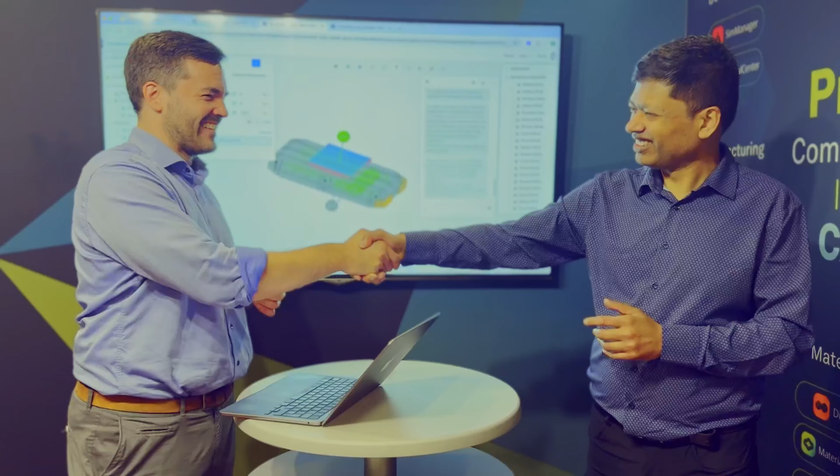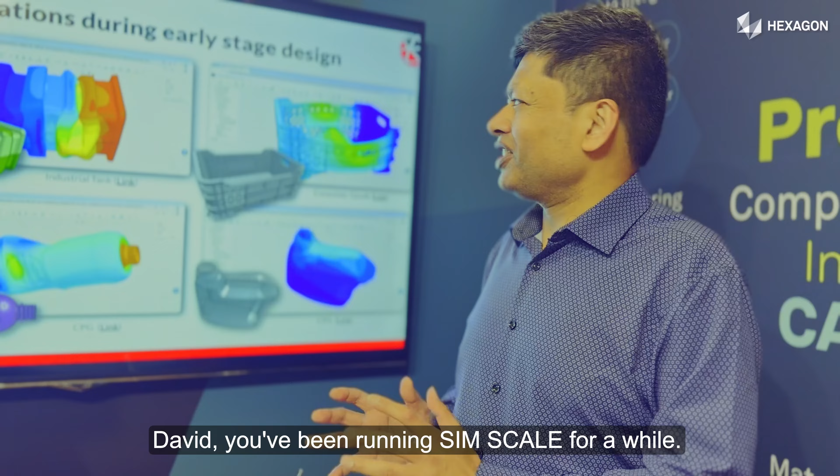David, you've been running SimScale for a while. You're the co-founder and CEO. We just started working with you about a year ago on Marc technology. Why now? Why are you excited about this partnership?

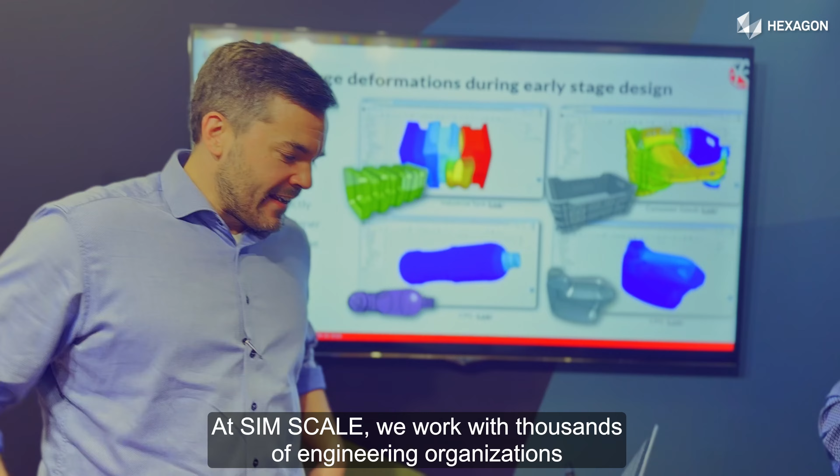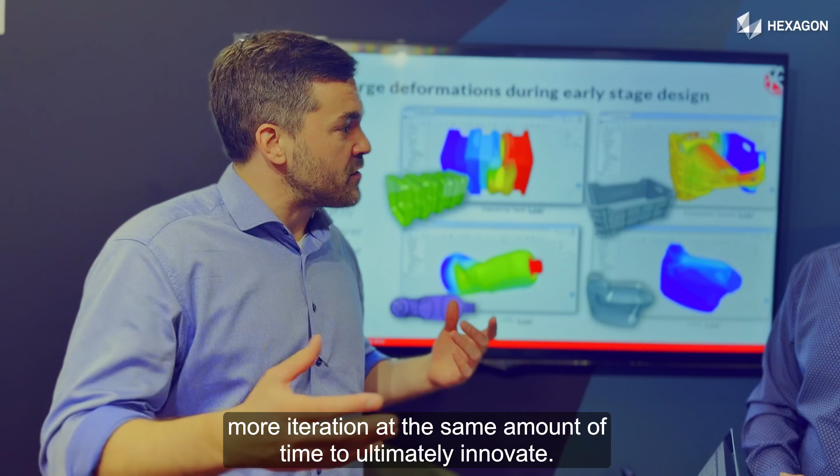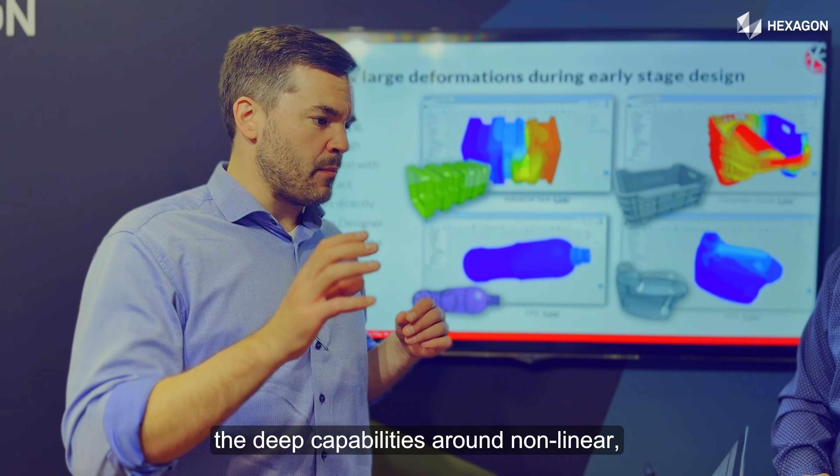At SimScale, we work with thousands of engineering organizations to help them deploy simulation earlier, broader, more aggressively in pursuit of faster engineering cycles, more iteration in the same amount of time to ultimately innovate. We've done this across a number of physics and solvers, really a broad spectrum. But what was always missing was capabilities around nonlinear material behavior and the like.

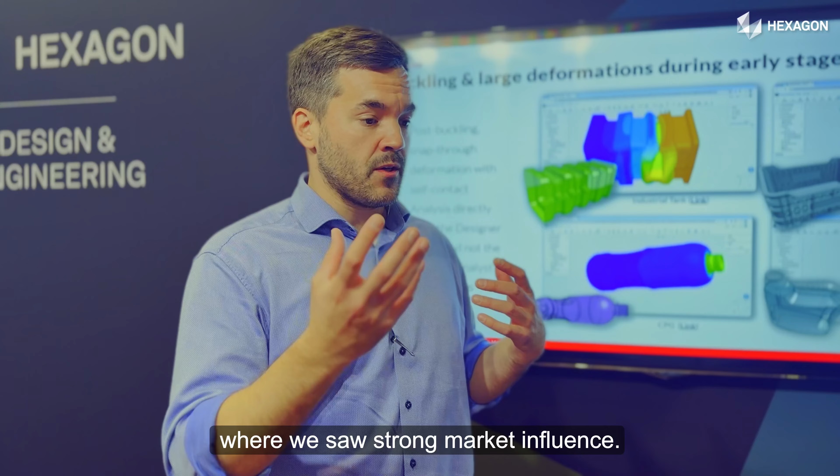Now, as we've built up a lot of physics, we saw strong market demand, and the Hexagon team was seeing the same opportunity of being able to deploy this very capable nonlinear simulation technology much more broadly.

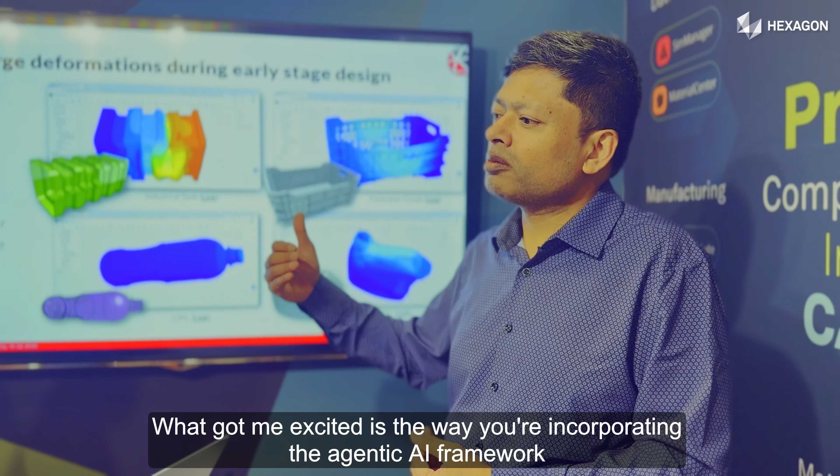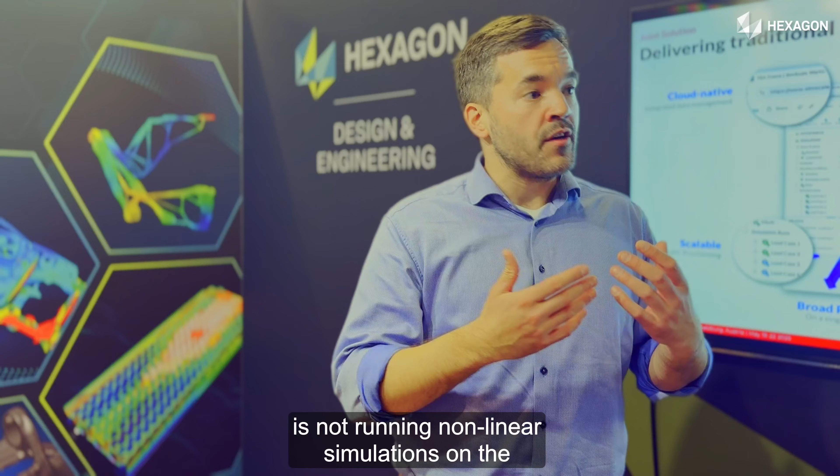What got me excited is the way you're incorporating the agentic AI framework to help somebody who is not running nonlinear simulations on a day-to-day basis use it effectively to start testing the technology. One of the enabling technologies is what we call engineering AI.

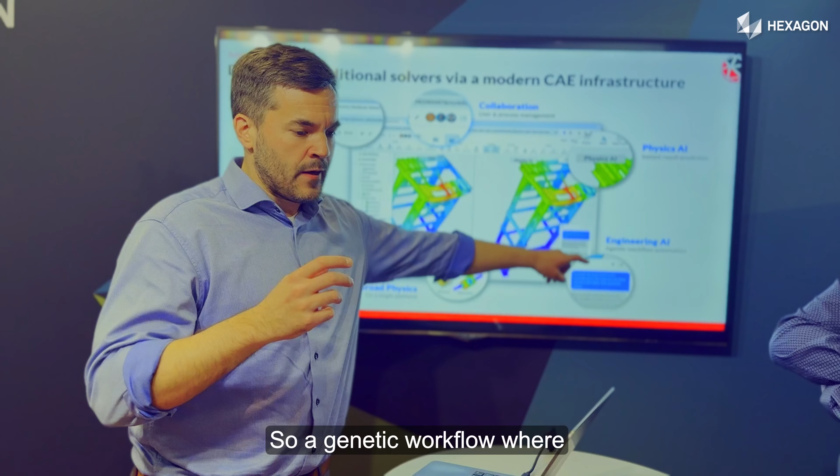So agentic workflows where an AI engine starts not just predicting physics, but actually interpreting CAD, setting up the simulation, working through the simulation setup based on a certain guideline for the organization.

A good example for Marc is the crush test of a battery pack tutorial model. We can see the stamp going down, and there's certain energy being introduced into the assembly, and you're interested in whether or not it can sustain it.

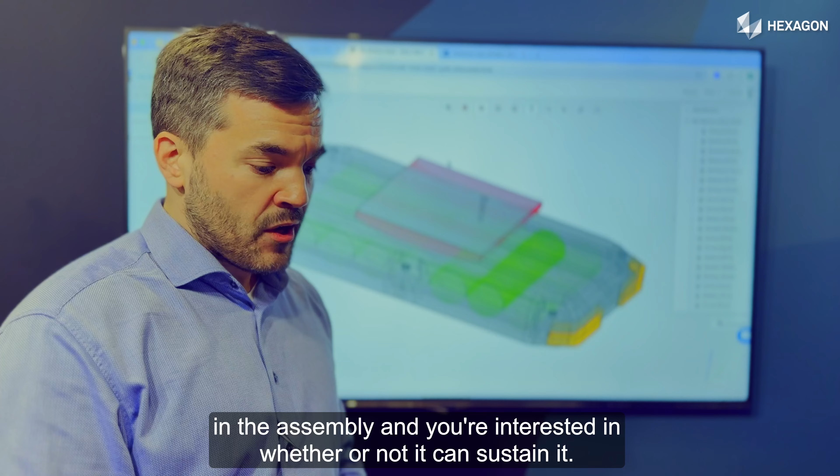So of course, you could now import a simulation template. I could bring in, using SimScale's process management capabilities, an existing simulation template, or I can leverage the fact that transformer models are now included in SimScale natively, and ask the transformer model to actually do this for me.

As we're seeing transformer models in other industries being picked up, reasoning through intent and reasoning through what it sees, it can use SimScale.

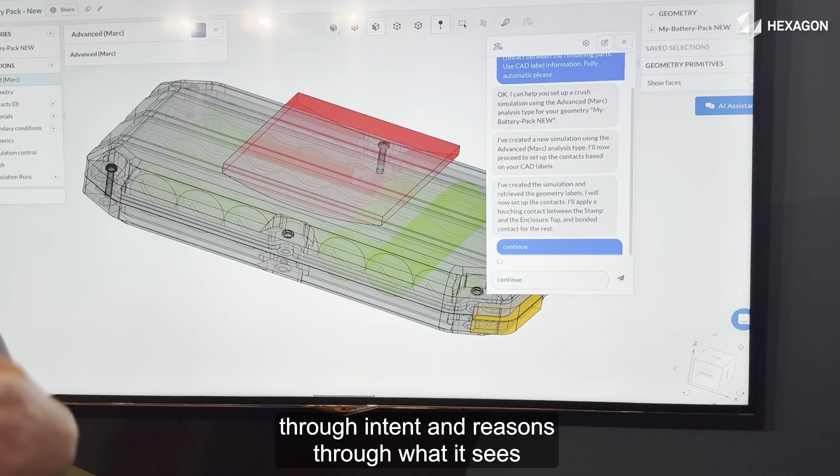So we're seeing it now applying the different contact setups. It asks whether or not it should deal with the materials or not, so we'll ask it to do so.

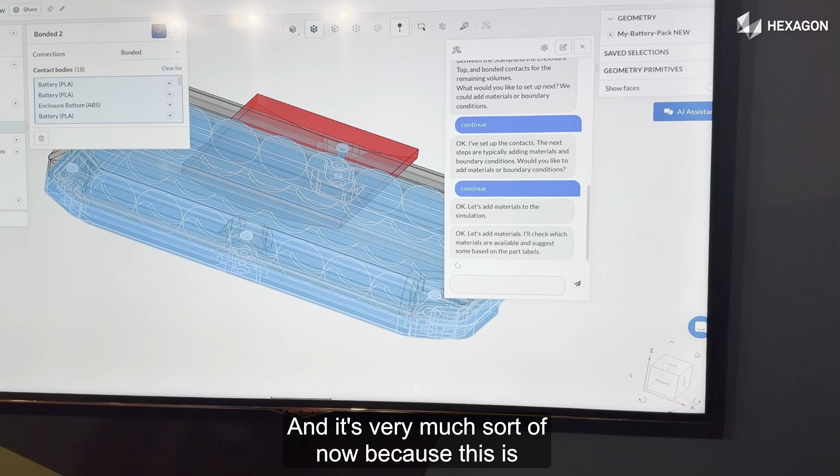And again, you can see it's not tuned yet, but I also like that it's pausing and letting you as the user do the guided assist to say yes, you should continue. This is out of the box, what we supply out of the box, so it's a system that hasn't been tuned to any organizational workflow.

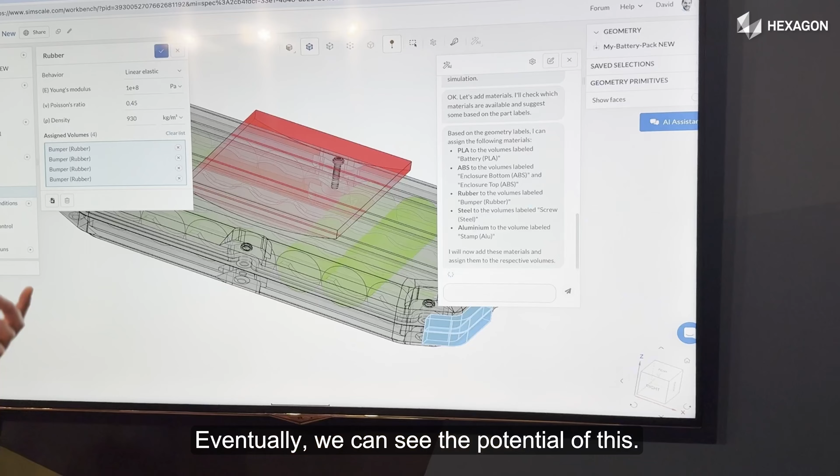As an engineering team, I would want the engineering AI to behave in a specific way, to be verbose or not. So in this case we're watching a junior AI engineer, but eventually one can see the potential. Many industries - medical, automotive, bushings, fasteners, gaskets, you name it - are highly nonlinear in terms of material.

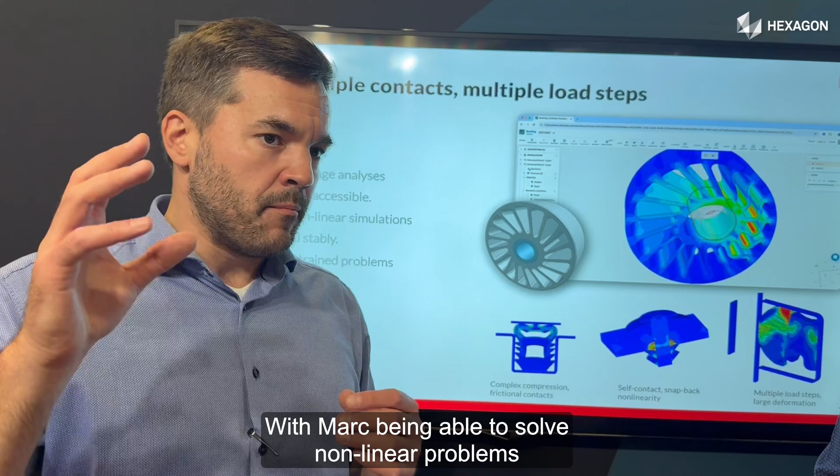The combination of the way we're able to deploy simulation broadly while maintaining central quality control, with Marc being able to solve nonlinear problems in less time, with a level of robustness we haven't seen, gets us excited about the potential.

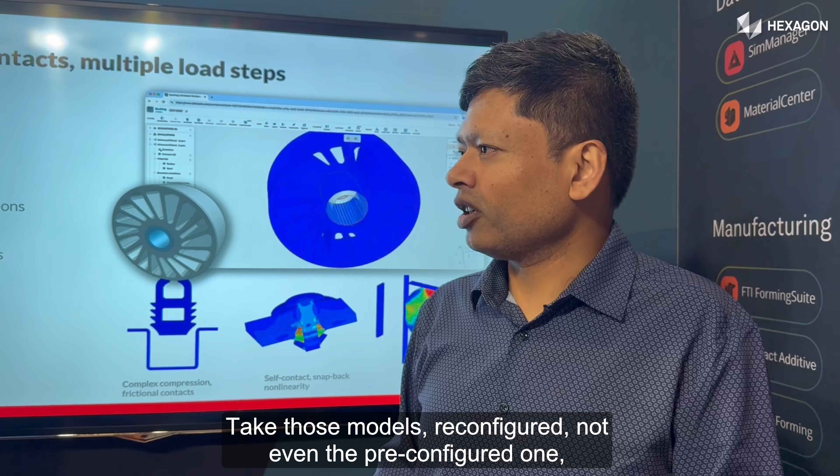I didn't want to wait for the training. I said, no, I'm just going to start it myself. I was quickly able to get models from the library, take those models, not even pre-configured ones, the regular ones, and do it myself, and launch it.

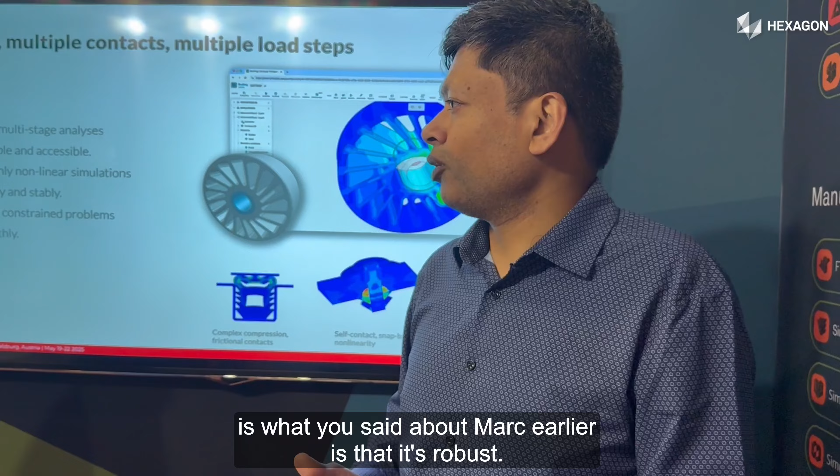That's really the core I think that SimScale is bringing. And what's really exciting, being a nonlinear user myself for the last two decades, is what you said about Marc earlier - that it's robust. If you talk to a typical nonlinear expert, the first question they'll ask is how much artificial damping you have. There's no artificial damping here because it converges out of the box.

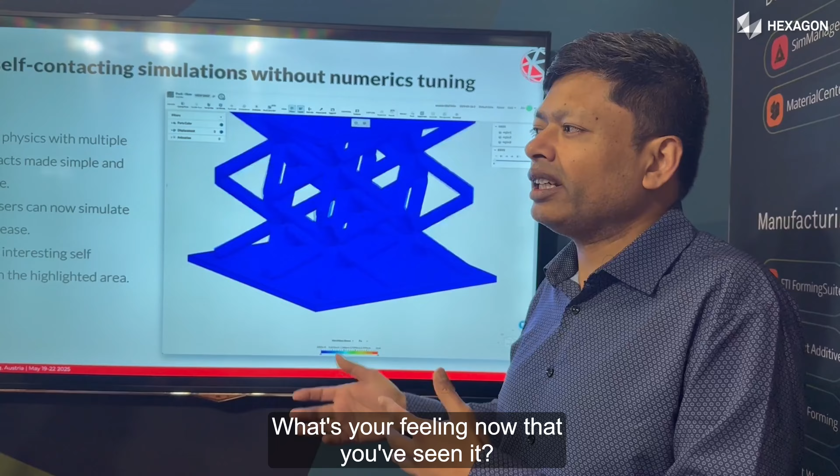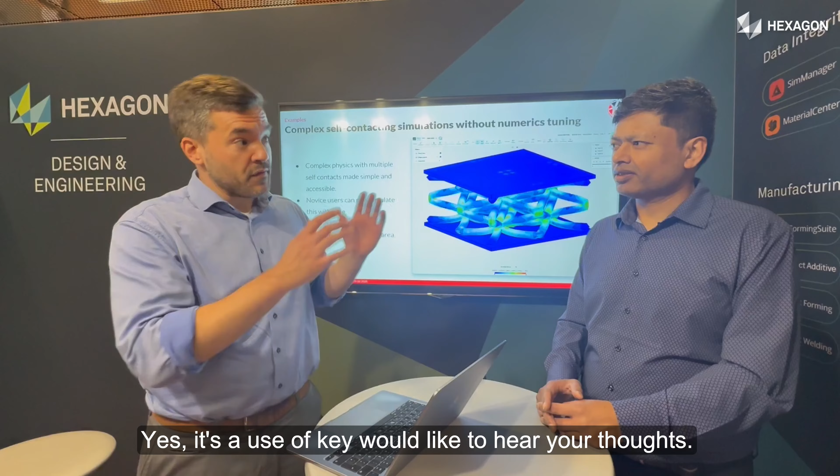What's your feeling now that you've seen it? We know that in order to make the simulation democratization initiative, or broad deployment, or a shift-left initiative - engineering teams have different names for it - succeed, ease of use is key, and I would like to hear that you found it to be easy to use. Collaboration is key, data management, HPC provisioning - those things are key to actually solving the engineering problem fast, and robustness is key as well.

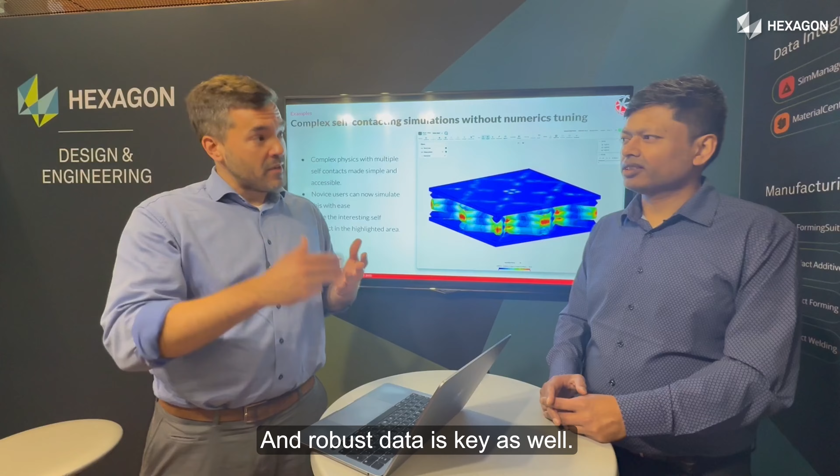As I tested it - when can the world test it? All of these examples here are run in production, so it's a production system where all of these simulations have been carried out in production.

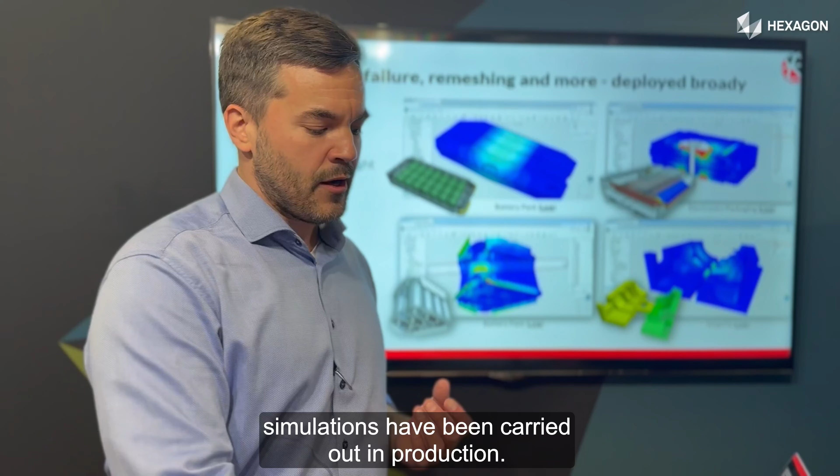So this is live right now, but indeed it's currently in beta mode with a selected set of early customers helping us give feedback. We have the first production launch in July.

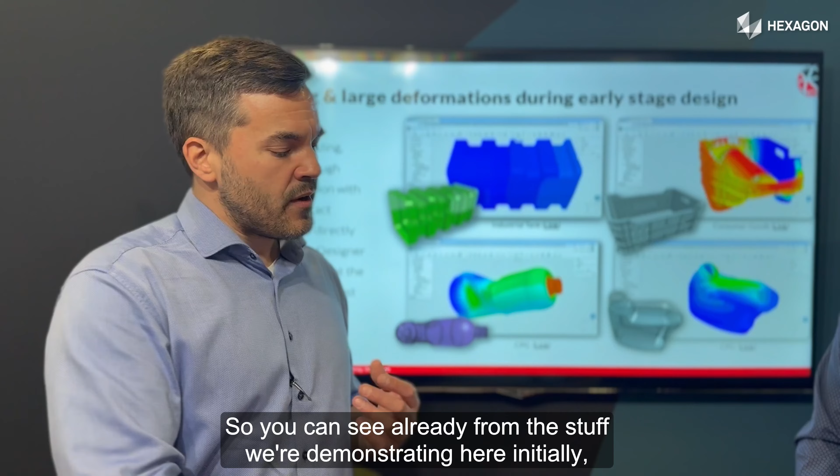You can already see from what we're demonstrating here where the initial focus is, but much more will come. In typical SimScale manner, we're deploying dozens of times each week, so more and more simulation capabilities of Marc will be made available.

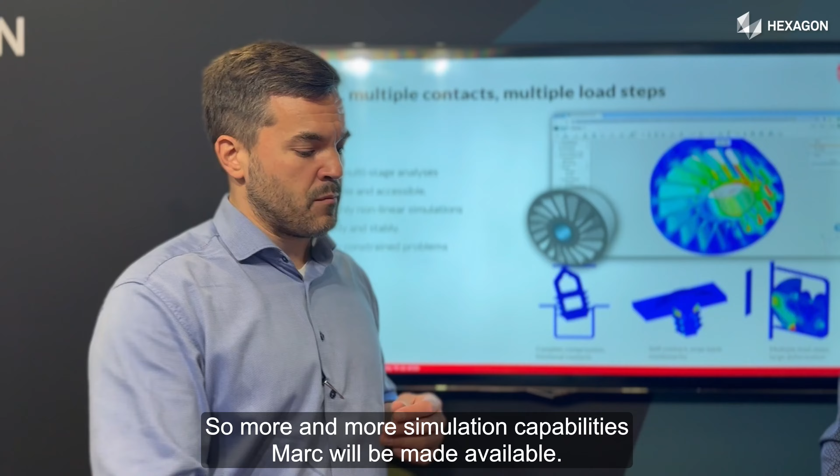So in a sense, the convergence of AI, compute, and physics is no longer a myth. It is a reality. And thanks for bringing this to our users and everybody at the board.

Yeah, thanks for having us.